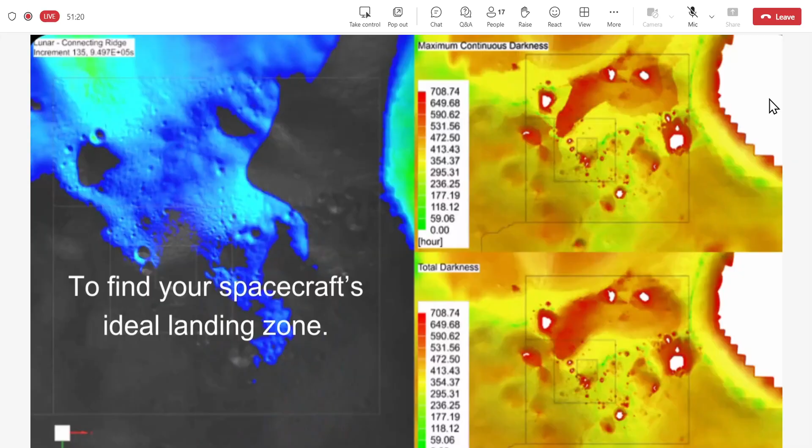As Jeevan did mention, FTD partners with Siemens to bring Siemens's premium portfolios to customers like you, which includes Space Systems Thermal. In the previous slide, we also saw NASA's LRO mission, where we had the thermal profile available for the south pole of the moon. That temperature profile can now be accessed and modeled using Simcenter Space Systems Thermal.

Moving on, the agenda for today, as we published earlier in the invite you might have used to register, is we will look at the next generation thermal simulation tools from Siemens, essentially unifying the conductive, radiative, as well as the orbital loads in a single unified platform.

Then we'll do a quick hands-on workflow where we will talk about leveraging a CAD example to start with, doing an analysis of an SJF satellite, and then we will very quickly see how that translates from the CAD environment to the simulation, in this case the space systems thermal, and then it gets on to downstream workflows like kinematics, which can be done on a concurrent basis.

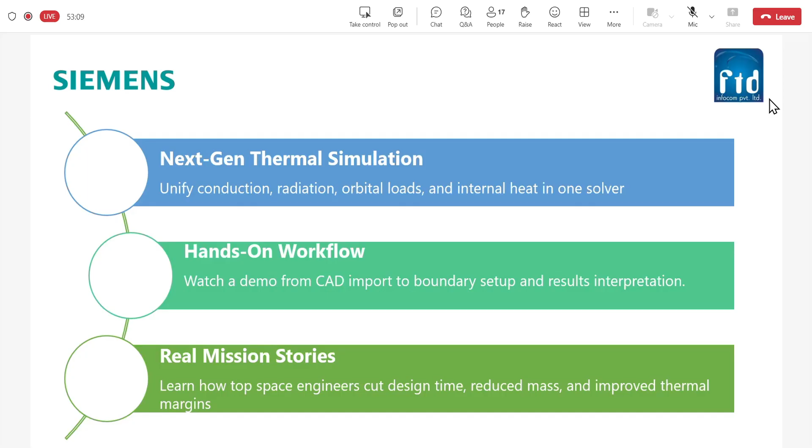As I mentioned earlier, we will take a very quick look at real mission stories, how this is used as a software and as a consultative tool in tandem with real mission profiles. So with that, let's get started. The first element of the conversation is leveraging CAD. Predominantly, most of you are aware that this forms the fundamental block of your new product development or the references.

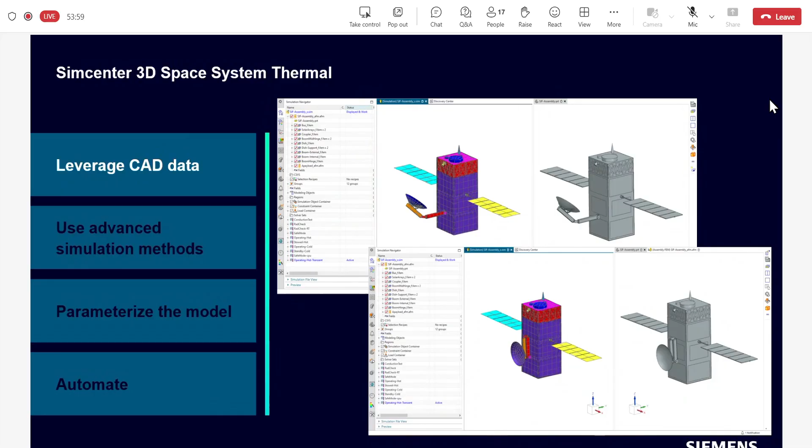So what you are going to see, if you are a novice user or possibly the first time entrant to the NXCAD environment, is this holistic NXCAD environment, or the NX platform, where the applications are aligned based on the deep feature functions they carry, which reflects the industry workflows, for example, modeling, assembly, drafting, and so on.

So what you see is a SJF assembly, and on the left-hand side, you'll see the assembly navigator to start with. We would like to take a quick look at how we are going to navigate through this assembly, just to do a few checks. For example, the antenna is in the deployed condition. Then we have a couple of sub-assembly elements which we can quickly navigate through, for example the star tracker, the bus, the boom, and of course the payload.

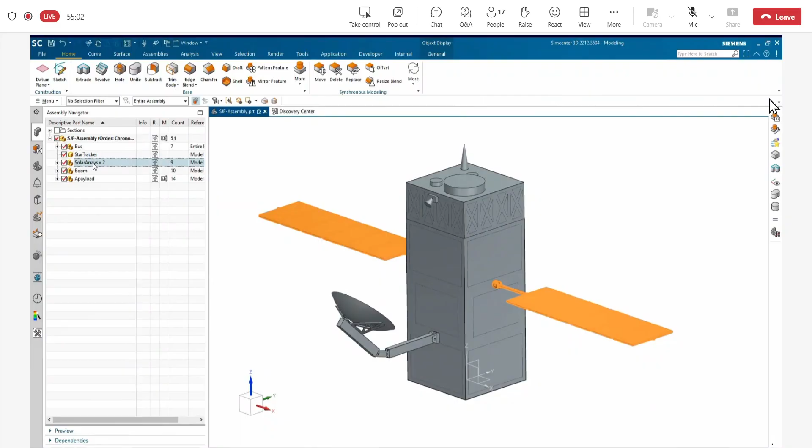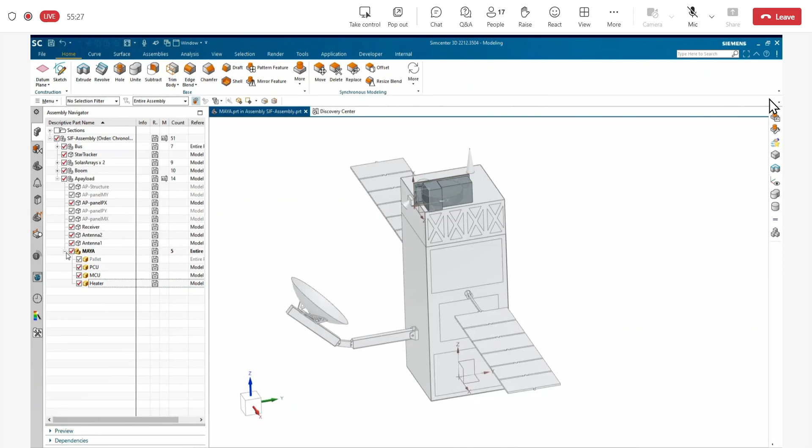If I go into more detail on the payloads, here's a bit more deeper insight for you: within the payloads you have PCU, MCU, heater, and pallet units. This is the area of focus for us, where we would like to do some thermal simulation to start with, essentially to capture the amount of heat generated through radiation and conduction. The backside of the payload has three perforations or slots, which virtually represent the cooling mechanism that we will talk about in a minute.

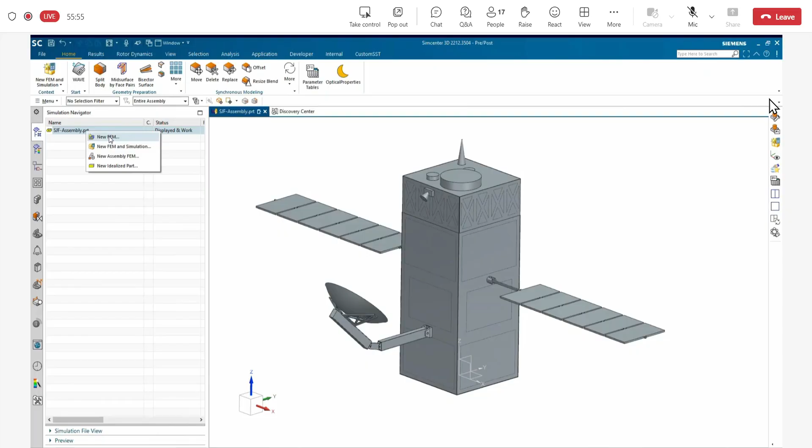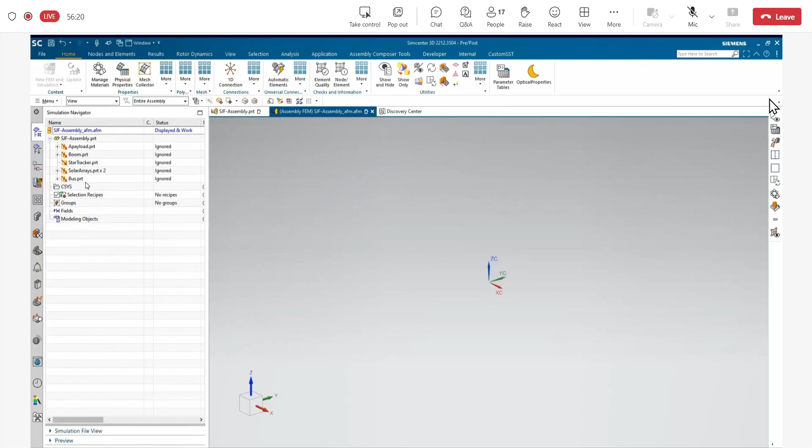Once you have inspected or navigated through the assembly, it's time for us to create a simulation. In this case, you would want to start with an assembly FEM. You heard me right. SimCenter 3D helps you create an assembly FEM, just like the way you would create your CAD assemblies, and helps you map or superimpose the CAD assembly architecture onto the simulation, thereby making sure your CAD and simulation are in sync and helping you make local changes very quickly.

On the top left screen of the simulation navigator, you are able to see that we are positioning or bringing in the part-level meshes we have done, and we are going to assemble them. This is typically a bottom-up approach of assembling the FEM, where you have a couple of FEM parts, and then you bring them in and assemble them to define the complete assembly - in this case, the SJF satellite.

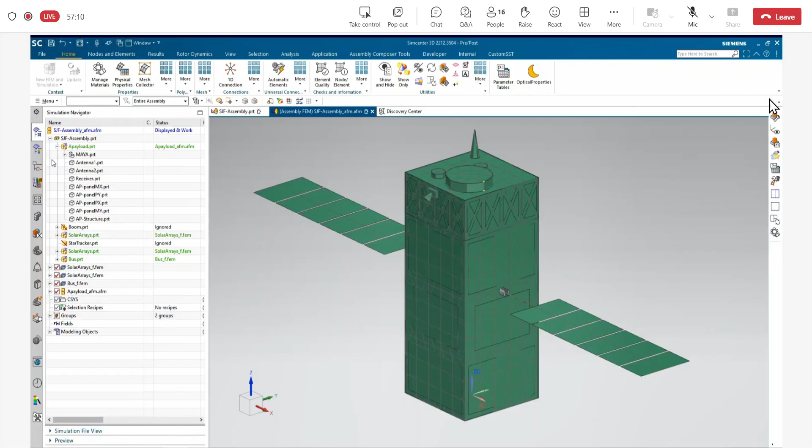Some of the components which are deployed or populated with the FEM are annotated in green color, whereas for the rest, which are not, they still need to be populated - they are either left gray or some are ignored, depending on the choices you make. Assembly FEM also gives you a provision where you can drill down to a particular sub-assembly or component and check for quality criteria. For instance, you can check for materials, check for real-time attributes, and once done, reconfirm the entire assembly is being assembled or mapped to your satisfaction.

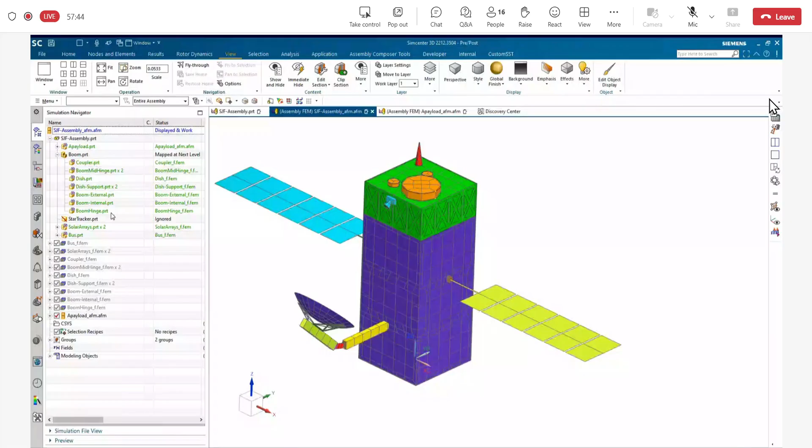So what you see on the left-hand side is the mesh of the assembly, which is an integration or a combination of multiple parts. This is one approach that Simcenter Space Systems Thermal takes.

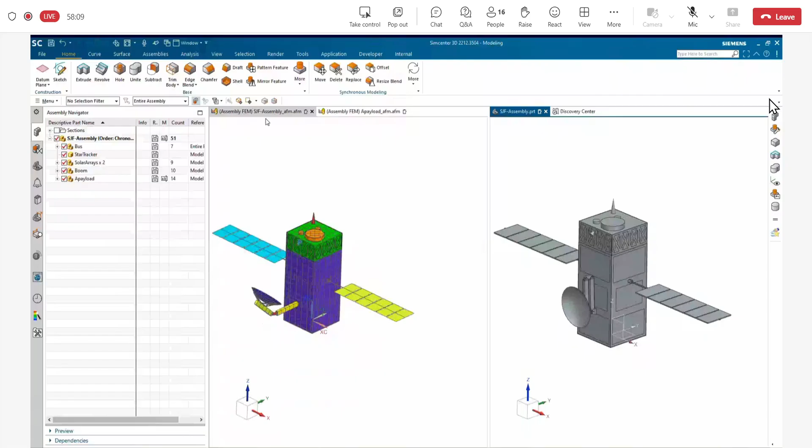The next thing you would want to do is induce a change into the assembly. For example, you would want to see the antenna stowed in the stowed condition. Earlier, we had put it in the deployed condition, but suddenly, because of a change in the CAD, you also see that the assembly FEM is out of date. Once you hit the quick update button on the top left corner, you see that the mesh of the antenna and the corresponding holders will also get updated. This gives you a tremendous ability to do a quick check in terms of design changes, and to further refine or take the assembly through the next set of boundary conditions.

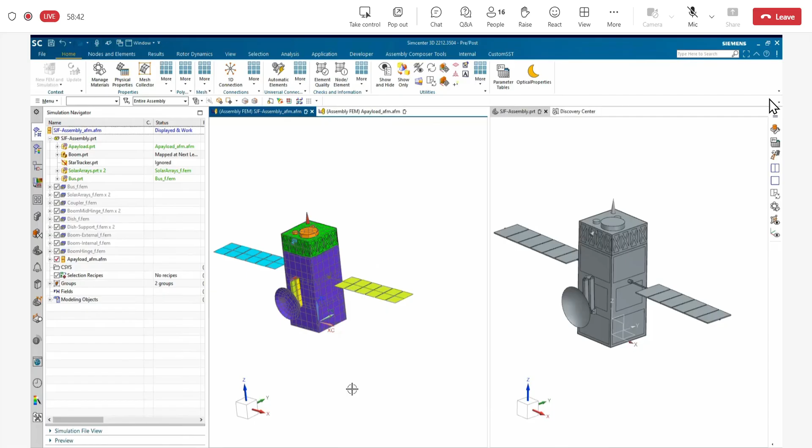What we would like to do is quickly walk you through a couple more workflows with Simcenter 3D Space Systems Thermal. We are going to use a live example here. You can indicate to us in the chat box if you are not able to see the Simcenter 3D screen.

If you are a first-time user of Simcenter 3D, this is the user interface you will see. Like most CAD environments, we have a simulation navigator which helps you navigate through multiple aspects of your model, including the geometry you have specified. It also goes into the simulation and the FEM file, and so on. Right now we are looking at the assembly FEM file.

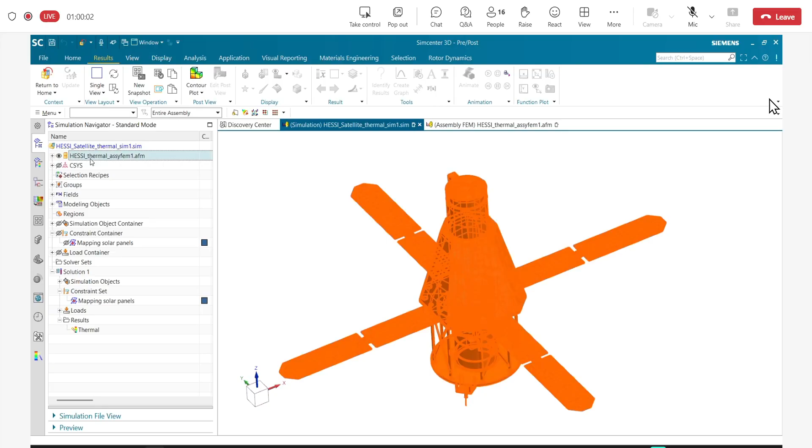If you pay closer attention, you see a series of elements which are meshed either in 3D space or in 2D space, depending on the modeling approach you want to take. What I really want to spend time explaining here today is how you have the thermal model available to you, or how you have created the mesh through meshing practices. So these are the simulation environments we are working in.

The first thing I would like to look at is that if I have to do a Space Systems Thermal model, we need to set up some initial conditions. The first one being what planet you would want to model. Space Systems Thermal gives us the ability to model various planets, including Earth, Venus, Mercury, Saturn. And if you have no specific planet to model, you can start with a generic one, as you see on the screen.

The second thing you would like to look at is the orbit, where we are looking at the classical geostationary, or the sun synchronous, or Molniya, and so on. This gives you the flexibility of playing around with the planet and orbit type. Depending on the choices you make, the orbit periods are locked in, and these calculations are done automatically at the back end.

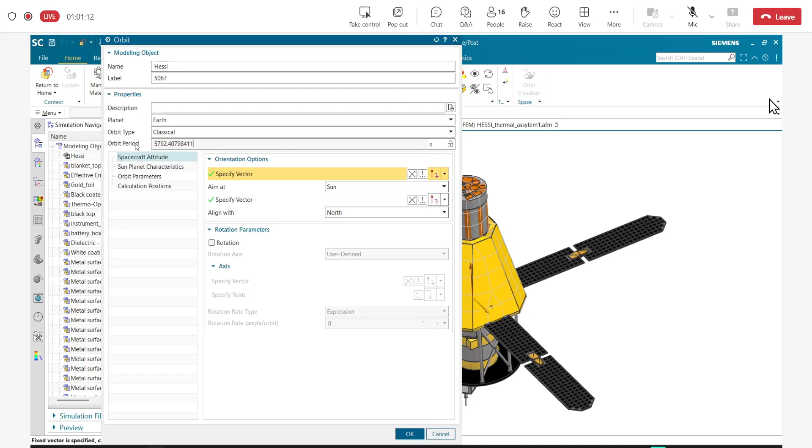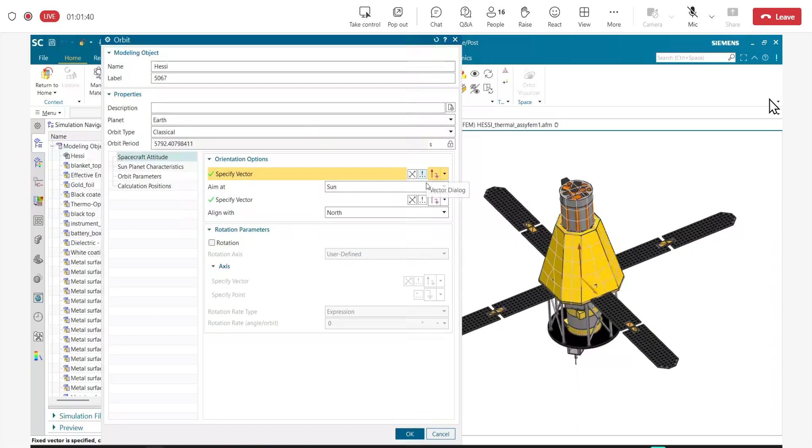You will be able to look at the orbit period. The second part you are going to look at is how the orbit, or the satellite, is going to be positioned hovering the Earth in the classical orbit type. This is where you specify what we call the vectors, which essentially help you position the satellite in the context of the sun as well as the orbiting entity. You can leave it with the current choices, or you can make your individual choices right here.

The second part you would like to look at is once you have defined the planet data, at the top we talk about the planet period, which in this case is about 86,400 seconds. We also want to account for albedo, which in this case is about 0.3. Then there are additional parameters you might be interested to spend some time on.

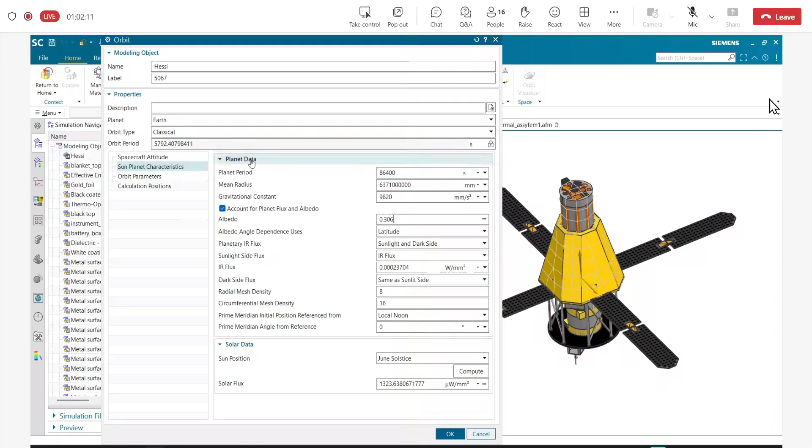In my case, I'm more interested in positioning, or talking about the sun position, where we discuss the June solstice, or depending on the simulation you want to carry out, you can set up other positioning parameters. Correspondingly, you have a number that is calculated for the solar flux available to you.

In terms of orbital parameters, you can specify the orbit in terms of minimum altitude, radius, or maximum altitude, radius. You can also look at eccentricity and periods as options. Moving on, what we ideally want to do is start with the planet as Earth, looking at the orbit type as classical, and then we're done. Once I define this modeling object, it comes and resides here in the simulation navigator.

At any given point in time, this is a parametric entity. You could come back and change the essential parameters that you would need.

A similar way of engaging on the simulation objects or the modeling objects is defining what we call as the thermo-optical properties. So there are multiple ways that I can define the thermo-optical properties here.

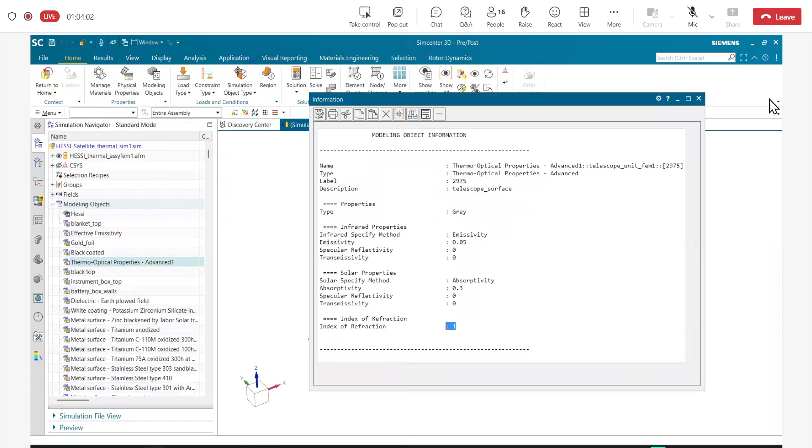Very quickly bringing to your attention, one such has been created. I can take a quick look here, and this comes in with an infrared specify method for emissivity. We are looking at an emissivity of 0.05, an absorption coefficient or absorptivity of 0.3, and an index of refraction of 1. So these are the details that are available to you as part of your modeling objects.

These have been done, and the details have been captured very intensely as part of your modeling efforts, as you would see here.

Once your modeling objects are done, I'll quickly walk you through what we call the simulation object container, where we are talking about the relationship between the two parts or the two surfaces, edges, or the solids themselves, and how they are connected with each other.

For example, the first one, beam to top ring — let me give you a quick rundown on how this looks in terms of the relationship. Here, we are doing a thermal coupling for a given set of faces or a given set of edges, and we are going to look at primary and secondary regions or primary and secondary faces.

And the last thing you would want to specify is whether you're defining the thermal coupling through total conductance, total resistance, or a heat transfer coefficient, or an edge contact definition. In this case, we have done an edge contact, which is around 35 watts per meter Kelvin for a particular length, in this case, meter length.

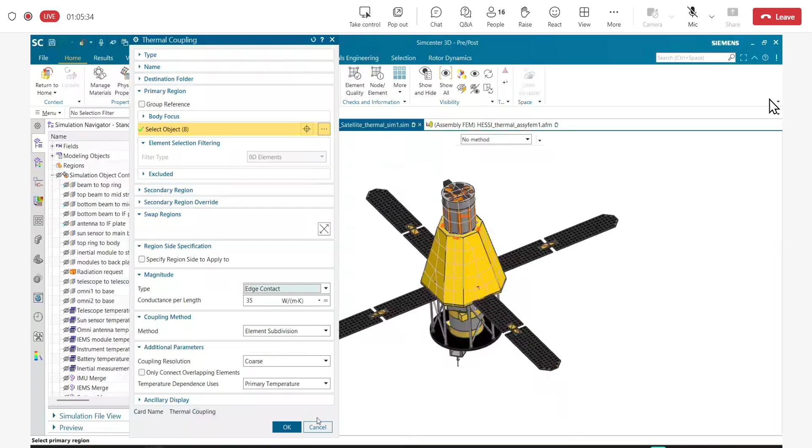Once you are done with this, you can go back and take a quick look. Where does this reside? It's right up here. And similarly, you could add some more simulation objects.

For example, you would want to look for the radiation requests. So what are the entities for which you would want to have the radiation requests, whether it's for the top external radiation, or the non-dominant or say non-top elements for the radiation requests? That's something you will be able to articulate.

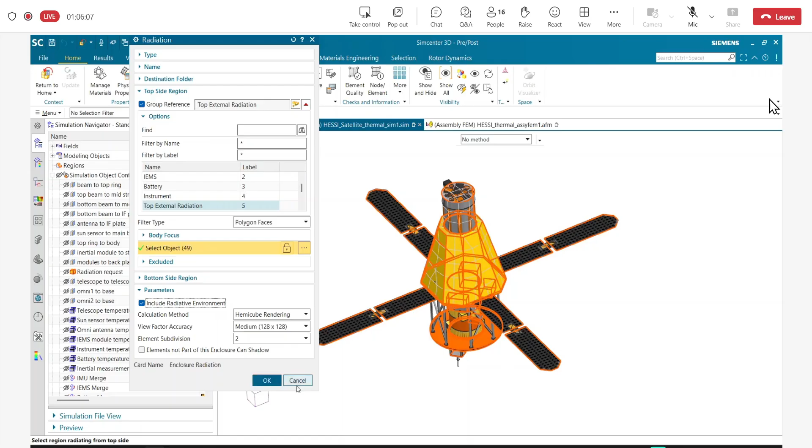We are still in the process of setting up our model here for the simulation. What we looked at is the modeling objects, where we defined the orbit, and also the advanced thermo-optical properties like emissivity and absorption.

The next thing we quickly did was look at the simulation objects, where we talked about the thermal coupling. It can be a very intense and advanced thermal coupling, or we can look at straight out of the box, automated thermal couplings. And then we looked at a very quick understanding of what we can do with the radiation request.

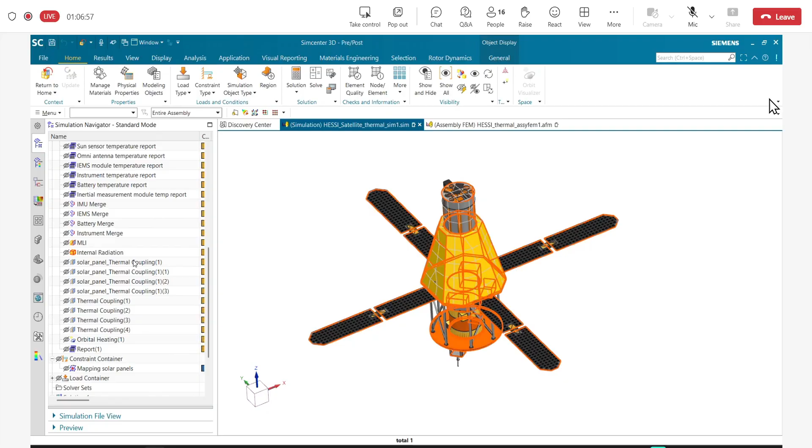And then finally, we are going to take a sneak peek into the constraints and the loads. Let me come to the loads first. Now, what are the loads that we are talking about here?

We are going to talk about a quick set of 220-watt load — that's the heat load we are seeing from these elements. Now, this could be a linear heat load, or it could be driven through a couple of expressions or parameters. For example, it could be measured, or it could be an expression, or it could be a function, and it can come from different unit forms.

Simcenter Space Systems Thermal is unit independent. Anything that you punch in will get carried and baselined with SI systems, and can be retrieved in the form and shape of the different unit systems that you will need for outputs.

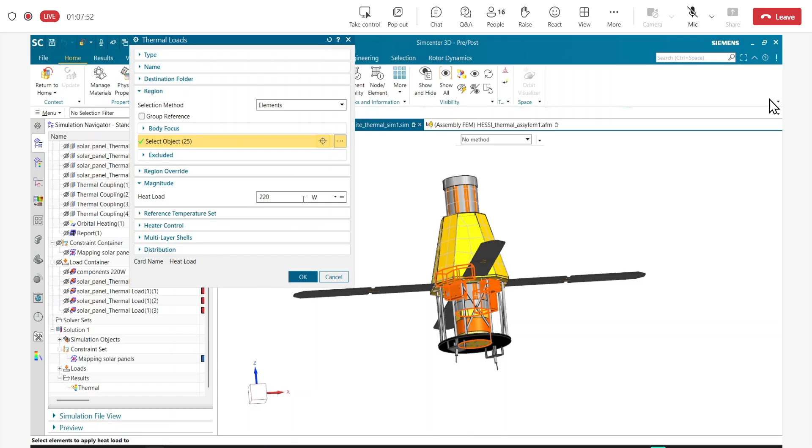So we have a component of 220 heat load. Then if I look at the four thermal solar panel thermal loads, I see a heat dissipation of 150 watts. And this is happening — the selections are based on elements, or, if you are doing it for the duct, it can be duct fluid nodes.

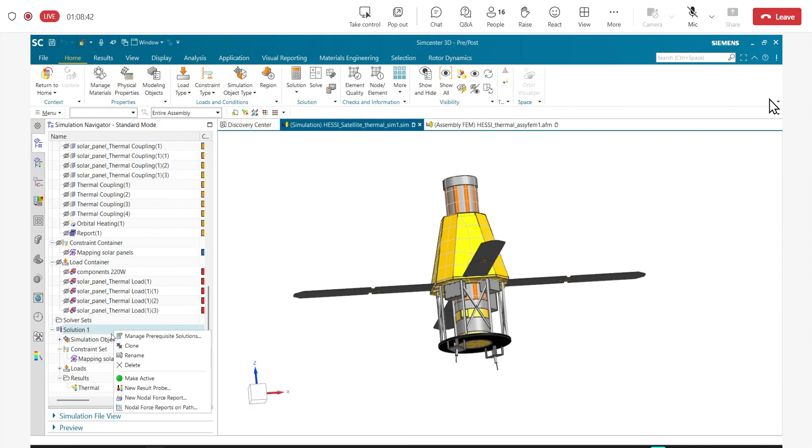So what we have here is a series of load containers, which essentially capture all the load bearings that are going to happen onto this particular model for this simulation. Once done, we have set up a simulation here. The way you are going to do it is either you jump start with doing a space system thermal, which I have created one here, or it's as simple as we go ahead and quickly say.

So either I can do it from the bottom end, or I can just go ahead and say I would like to create a new solution. And in this case, we are trying to drive a space system thermal conversation.

What are we trying to do? Are we trying to do a thermal simulation, or are we trying to superimpose or map the thermal simulation results to the structure? You have hybrid workflows available to you. In this case, we want to do thermal for the space systems.

That gets created here, and you have these loads as well as the boundary conditions, including the constraint sets defined. Once you hit solve, you will see a series of results.

In the interest of time, I'll quickly walk you through the results. The results are available here to me once the solution is done. If I do a double click, you will see that the simulation navigator intuitively changes to the post-process navigator. So the software is intelligent enough to understand that now you are moving from the simulation to the post-processing engagement, hence it provides you a series of tools and workflows where you can navigate the results.

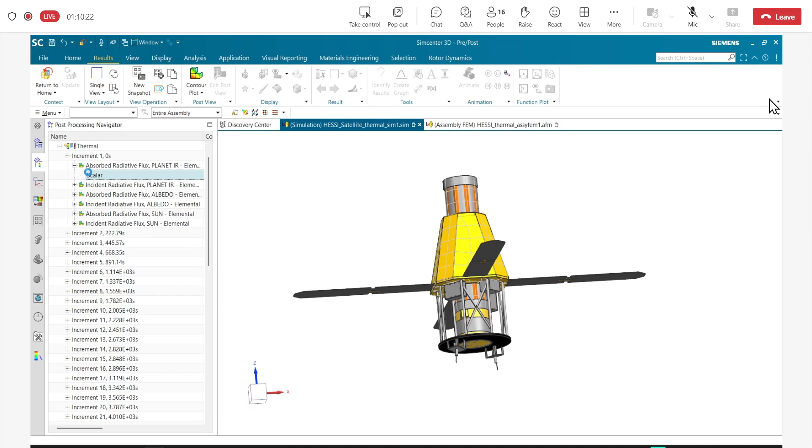For example, we are looking at the thermal simulation here, where we wanted to understand the absorbed radiation as well as the incident radiation flux for the planet, the albedo details, and the sun. This is one example, just to give you a perspective of how this looks like on your screen.

You could also specify in a single window multiple entities. What I would like to do very quickly is, while I am able to see the radiative flux for the planet and the element, we would like to also see the absorbed radiative flux for the albedo, for instance, to compare.

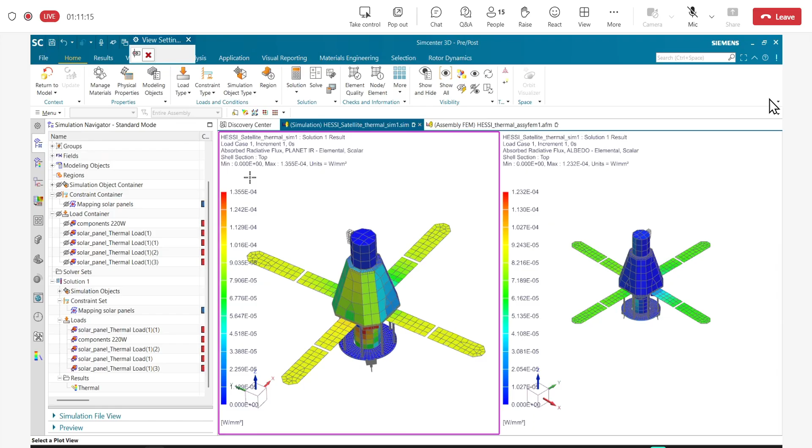So here is an example where you could do a side-by-side comparison or side-by-side play. On the left-hand side you have radiative flux, and on the right-hand side you have the absorbed flux for the albedo details. Now, once you want to come back, you can quickly go back to the model and set it up for a single view.

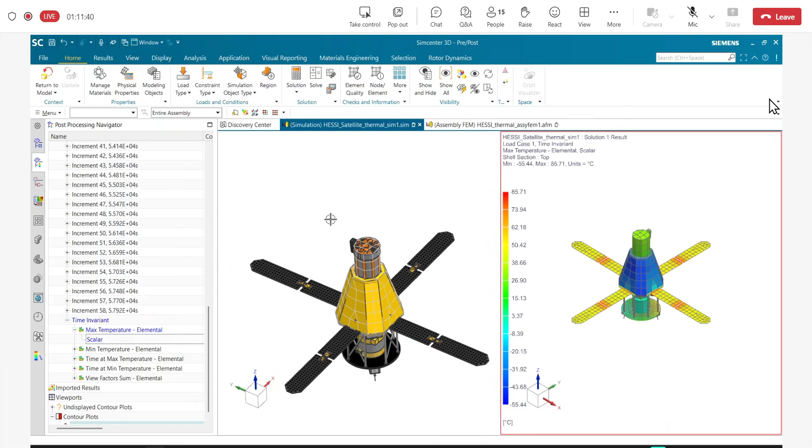In my case, we would want to understand a little more in terms of what are the maximum temperatures, for instance here, where we are going to look at the temperature distribution. You would notice that on the left-hand side of your view we have the finite element model, and down to the right-hand side you have the results.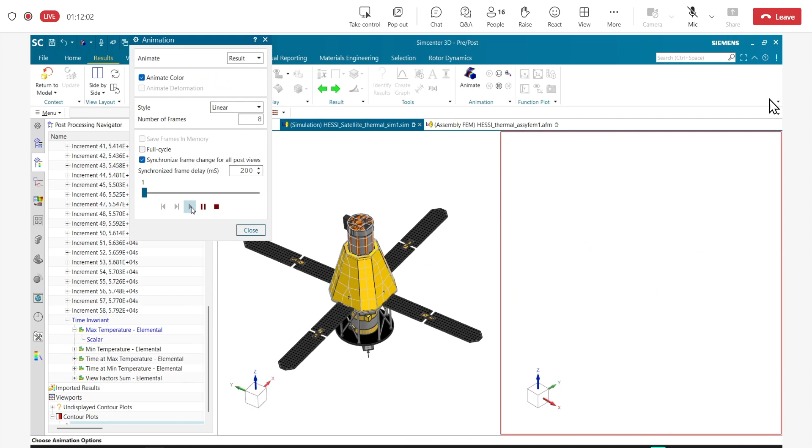What you can also do is animate, or play around with the results a little bit. For example, if I want to animate the results, I can quickly go ahead and do a quick animation, looking at how the temperature distribution takes place for a given set of boundary conditions that we have established, which ranges from minus 55 degrees all the way up to 85 degrees. I'll take a pause here.

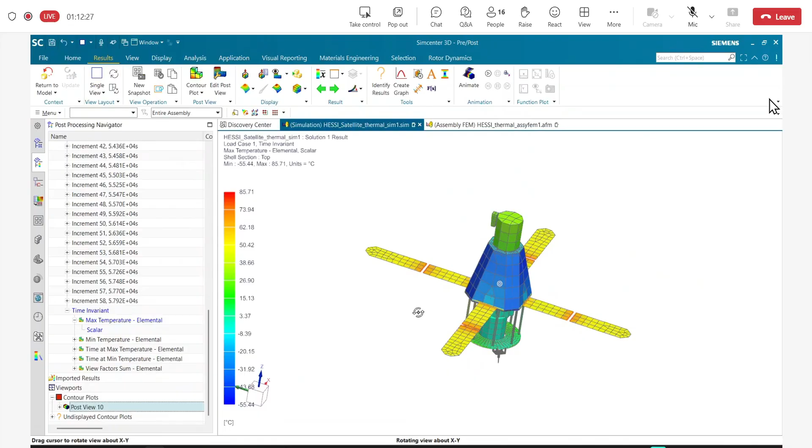What I would like to do is go back to my single view, and then we would like to plot the temperature variation. Or if I want to iterate my simulation with the timestamps, I can pick one of these increments, for example increment 55, and then we would like to see how the temperature distribution happens.

Again, a very quick, intuitive interface, helping me to articulate the start iteration from 32, end iteration 58, and then I'll just go ahead and see how the temperature distribution is happening across the satellite.

What's more interesting is I can very efficiently do a quick probe where I can come back and identify the results. For example, these could be your sensors, or these could be your virtual measures where you are identifying the details, and you can output them to a given Excel sheet or notepad. You can copy the information and so on.

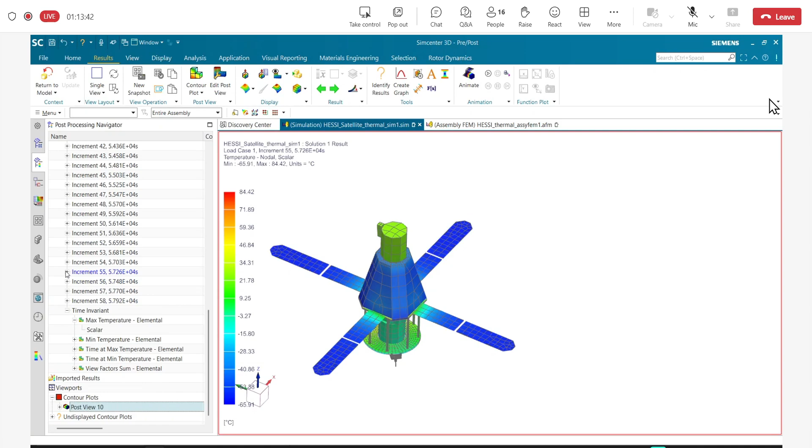That's all we wanted to see on a hands-on session live on Simcenter 3D Space Systems Thermal. As I did mention to you, it's a unified interface, which essentially helps you navigate various aspects of

your thermal modeling, including the pre-processing, solution, post-processing, and of course associating your model with the geometry. That's the integrated design and simulation concept.

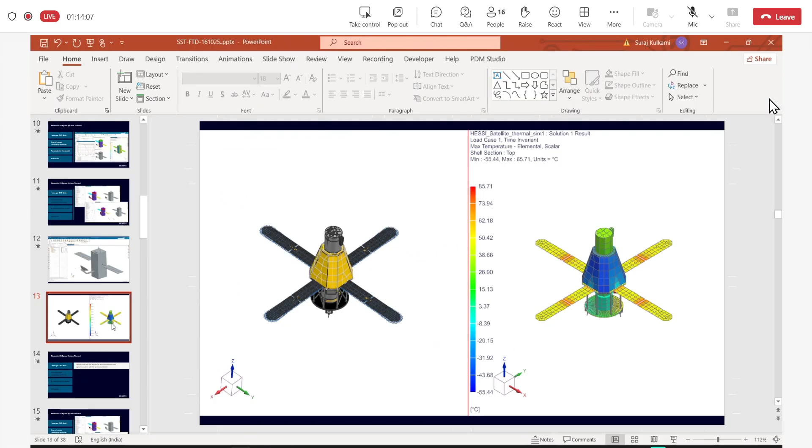What we will do is go back to the contents that we started to share. We talked in more detail about leveraging the CAD, primarily helping you stay in sync with the design team if there is a separate design team doing these entities.

Otherwise, if you are a project engineer, which happens to be the case in the Indian ecosystem most of the time, I do see that the designer will also don the role of the simulation engineer and vice versa. This helps you a great deal in terms of reducing your overall preparation time, and also keeps the geometry and simulation integrity with real-time feedback.

So with that, let's move on to the next one, where we will spend some time understanding. While this was a very simple example of putting our satellite in orbit, asking for the orbital loading in terms of the radiative heat transfer and what happens inside the satellite because of the radiative heat transfer

and the conductance, we will use some complex—or should I say advanced—simulation methods, which will help you reassess or recalibrate the physics you are simulating, and help you model the virtual model a lot closer to the actual physics happening in space.

So for that, we'll take another example: the SIF assembly. In this case, we have created multiple solve sets.

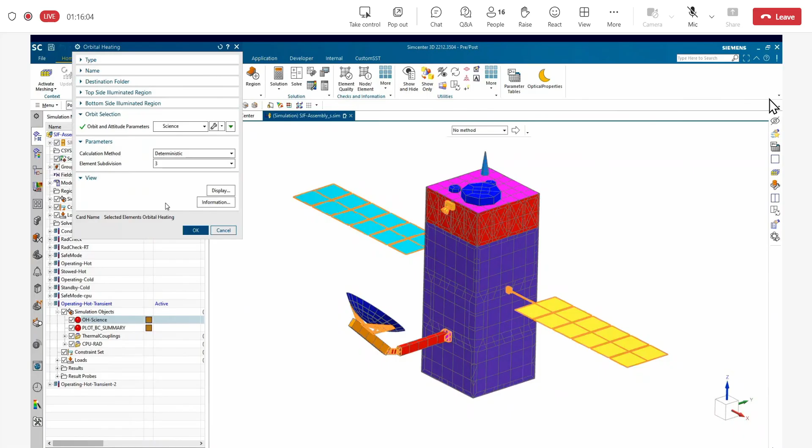As I mentioned to you, either you can pick the whole geometry of the satellite, or you can go back and pick a series of surfaces embedded with the top elements that can be picked.

Here, what you're doing is trying to establish the orbit and the positioning of this satellite in the context of the orbit.

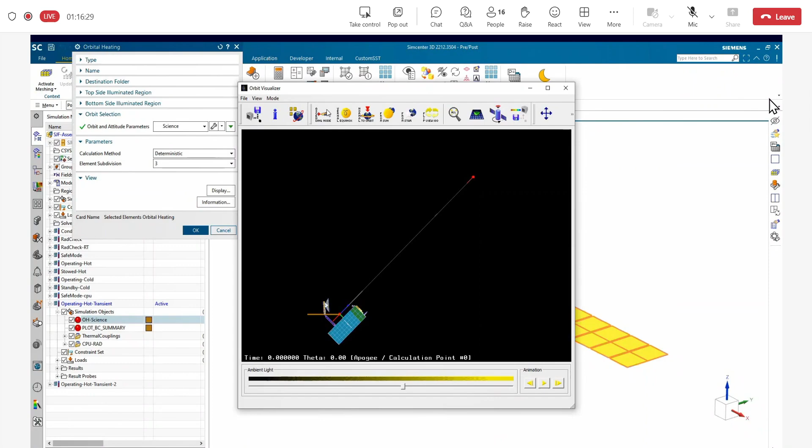And the beauty with Space Systems Thermal is that you will be able to see how the satellite is being positioned with respect to the planet and how it is going to orbit.

For example, in this case, the satellite is orbiting the Earth, and we have defined certain parameters. This infographic, or visual representation, helps you position the satellite a lot more smoothly and quickly.

The Orbit Visualizer is an embedded tool, or an embedded workflow function, inside Space Systems Thermal, that helps you navigate through the visual aspects.

The two simulations that we want to do: one is the orbital heating, and after that, we also want to take a look at how the cooling affects the payloads.

In this example, what we are seeing are the payload panels. If you remember, we explored this as part of our earlier example—the MCU, PDU, and the payload.

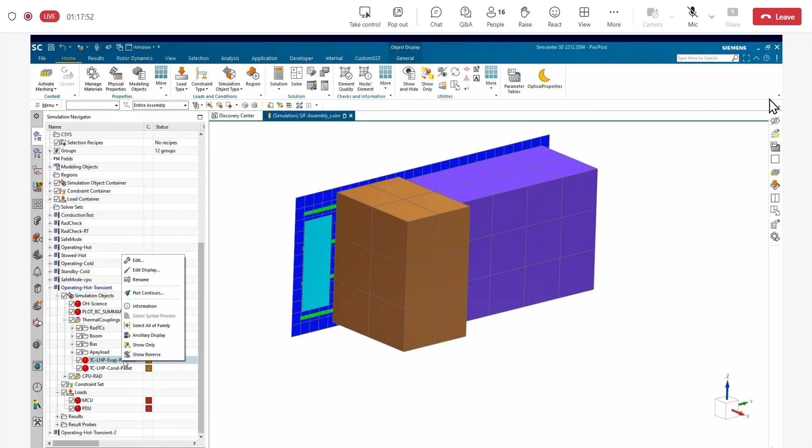What we are doing right now is assigning certain heat generation entities to these payload elements, and how they are connected to the atmosphere in terms of discharging the heat, either through

the evaporation-radiation mechanism, or the condensation-radiation mechanism.

So here we are doing the thermal coupling either through a total conductance method, which can drive the conductance through a static value, or you could specify the total conductance through a conditional builder.

Basically, you're building a function or an equation which will determine the conductance—a very classical example of incorporating your what-if scenarios.

In this case, we are going to settle for a constant value, so we'll just knock it down and say this is about 20 watts per degree centigrade. That's about it.

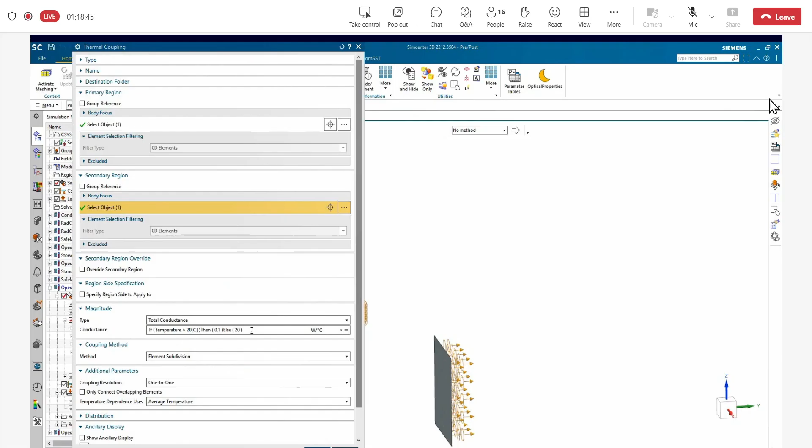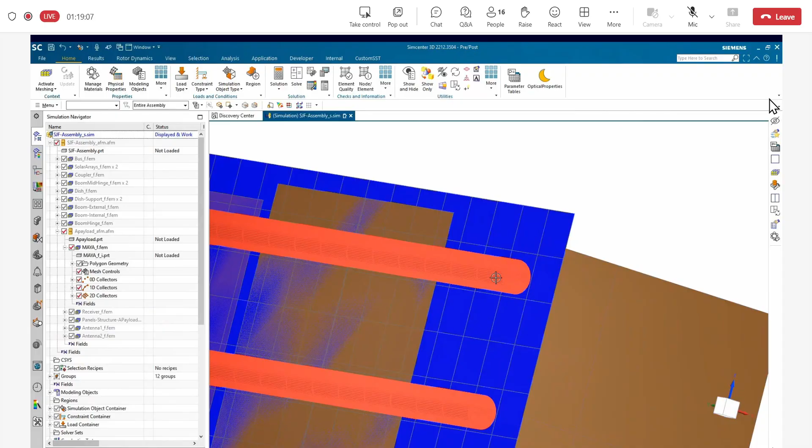Once you are done with the thermal coupling, we will reload our payload assembly here. This is a very critical area we wanted to highlight, where we look at the 1D connections, or basically the piping modeling that we do.

This is a very hot topic in the industry today, where we are going to look at the pipe modeling and the effect of heat pipes. There are four pipes that you see on your screen.

In terms of thermal coupling, what we are doing is associating these pipes to the payloads through different mechanisms or methods. One of the things we would like to do is showcase the piping cross sections so that you get a visual representation, or you can keep them in terms of the bare minimum entities on the assembly side.

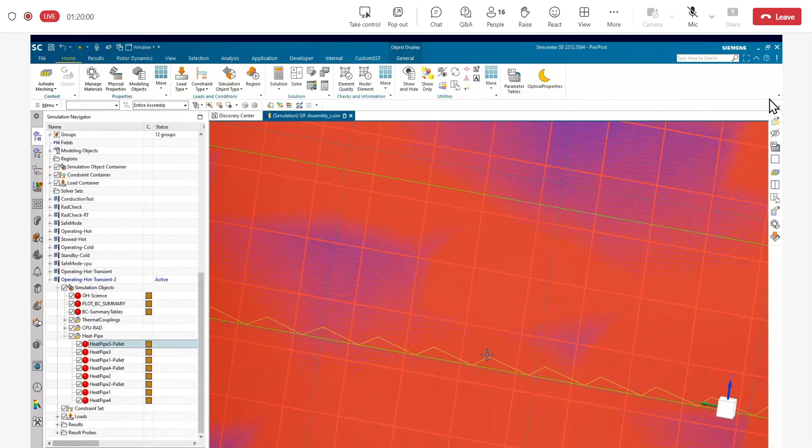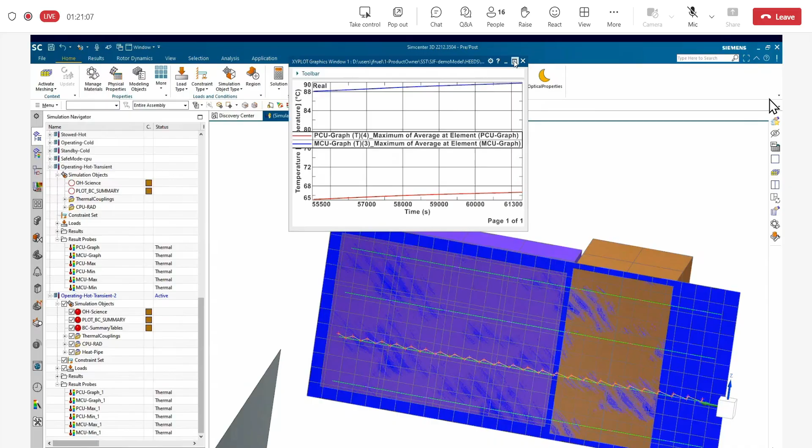Once we are set up with the simulation file, we'll go ahead and solve this. In the interest of time, we already have the solution done. If you look at the various elements of PCU, MCU, we are looking at the maximum and minimum temperature distributions, primarily with the cooling or heating pipes and the conditions we're looking at. The side-by-side comparison of operating hot for load case 1 and load case 2, that's hot transient 2 results, will give you a seamless comparison of what changes you induced into your boundary conditions or design, and how they impact your overall results.

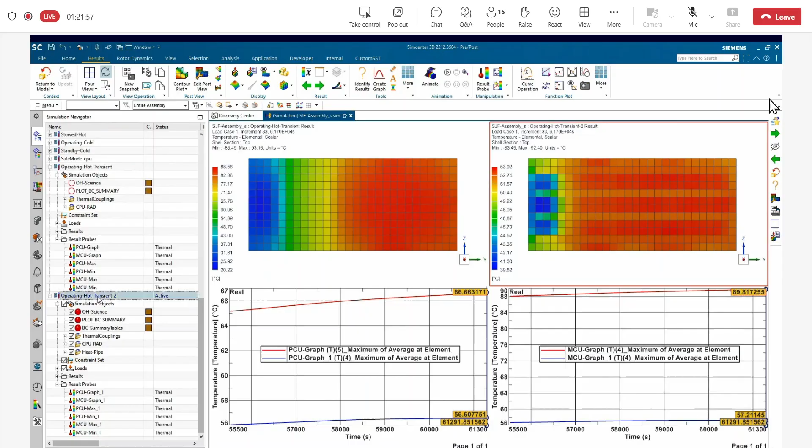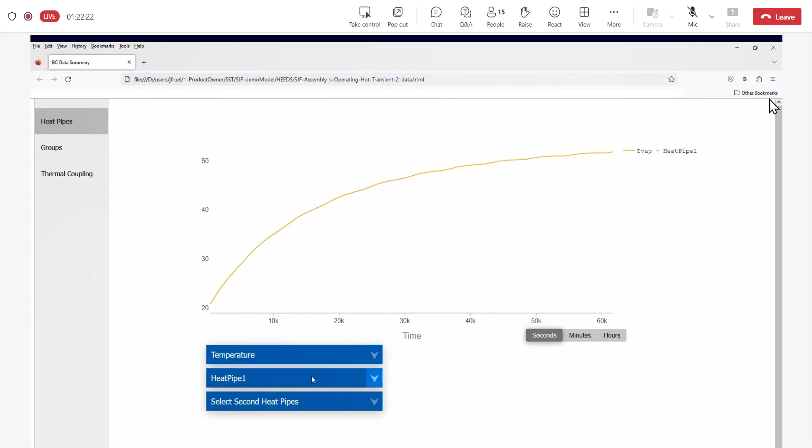You could also create a series of snapshots or templates which can be proprietary to your organization, for instance a specific set of template formats that you generate using Simcenter Space System Thermal. What we are seeing right now is an HTML file, which we'll open up and take a quick look at how we see the heat pipe and the temperature distributions over a period of time. For example, I can pick heat pipe 1 and see the temperature distribution in terms of seconds versus degrees centigrade, and how this is translated. You can pick and choose the details on the area or region of interest, and similarly look at heat pipe 2, 3, and 4.

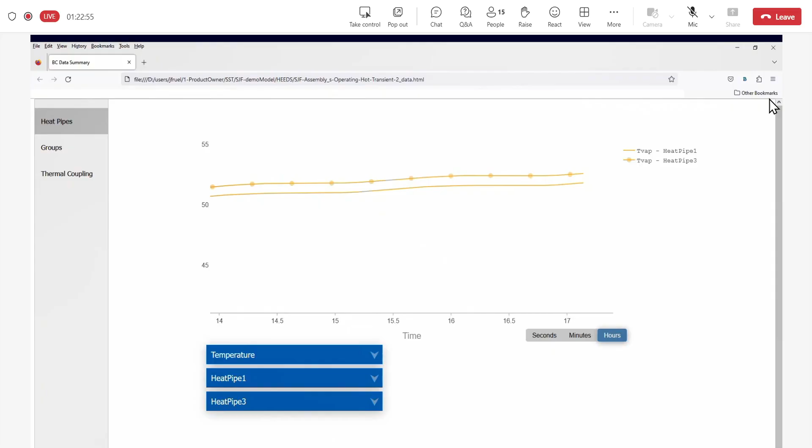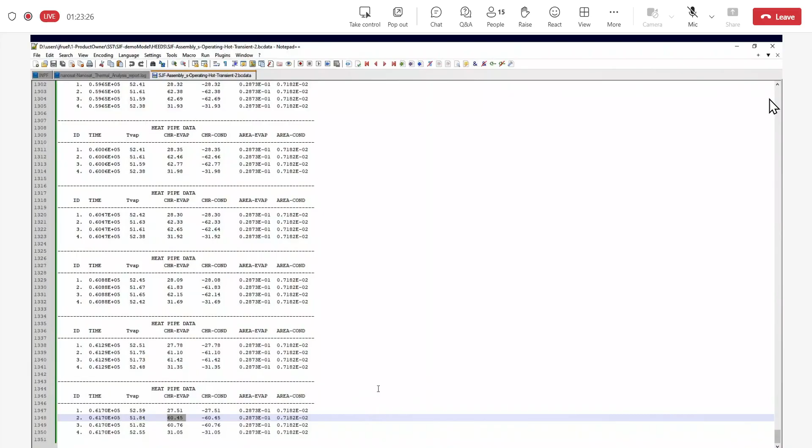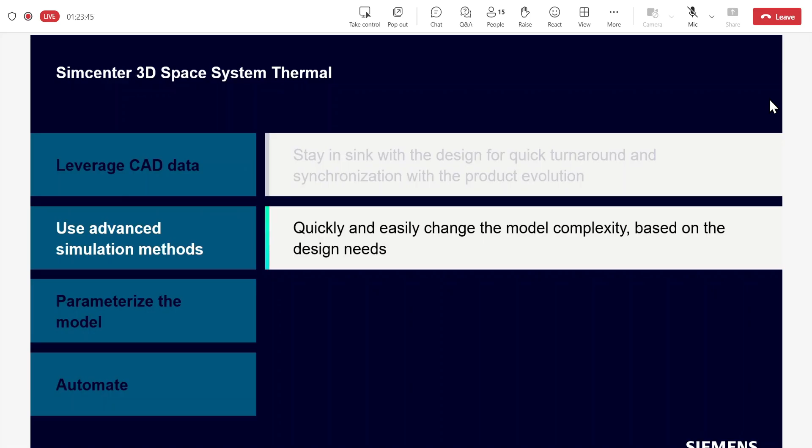If you look at the BC data input file, as you'll see on screen, it gives you a lot more detail in terms of various temperatures for evaporation, condensation, and so on. You'll be able to pinpoint and articulate the temperatures you'll be looking for in your downstream simulation activities. So that concludes what we call using advanced simulation methods, especially simulating heat pipes, which are very much in need and a very popular trend these days, in articulating your radiative, conductive, and convective heat transfers in the space industry.

We touched upon this briefly at the beginning, where we talked about parameterizing the models, because you run through so many operations, whether hot conditions, cold conditions, inertial conditions, or what we call static conditions. These are the entities created, for example the parameters needed to create multiple combinations for different modes, whether safe mode, operating hot mode, operating cold mode, standby, and so on. So how we're going to do this is using a very seamless integration of the parameterization entities into Space System Thermal. Let's take a quick look at this.

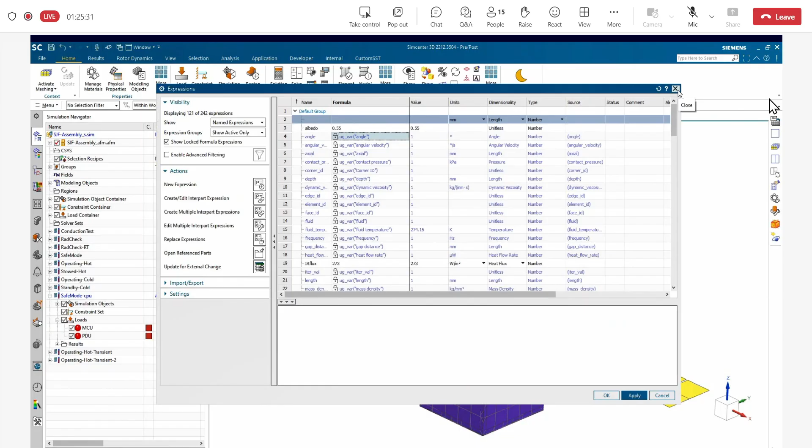You have seen the SIF model. What we want to do now is pick one or two, for example these are the 6 or 7 iterations or combinations that we have for the MCU and PDU loads. Now you can go ahead and define the parameters for the thermal loads, and these thermal loads can come in from expressions, driven either by an Excel sheet or by manual inputs. Here we are going to see the expressions which are named, where we talk about albedo, for instance it's 0.55, slightly on the higher side as against 0.3 that we specified earlier. So this gives you some initial ideas, or the initial references, and the rest of the angles are derived parameters, which basically reference the primary parameter or variable.

In terms of parameter tables, you can either import a parameter table or create one, what you are seeing on your screen.

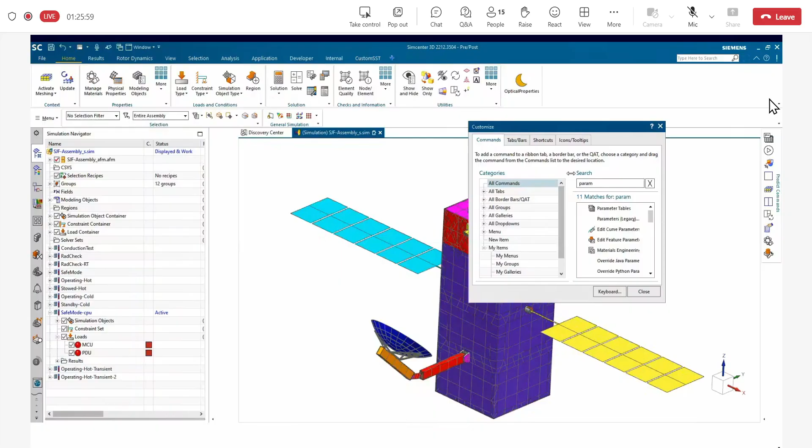Once you have a parameter series, you will be able to create a custom ribbon bar for the parameters, making it your own, so that you can access it very quickly without spending too much time on the other elements.

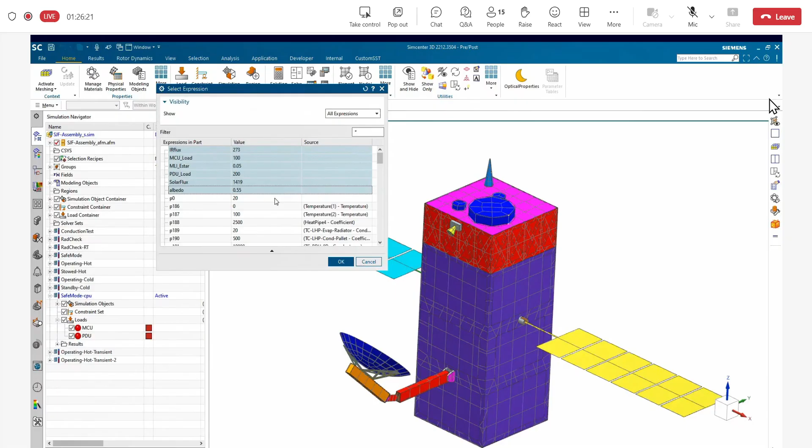So what we do is add expressions, and these are the expressions available to us in the part. We'll pick up the first 6 or 7 and add them to the table in terms of the parameters.

This is a configuration, and you can either activate it or duplicate it and change the values so that it becomes parametric. And of course, it's a series entity.

You would do the same thing for operating hot, operating cold, static hot, standby cold, and so on. The other way is to drive these parameters through an input file, what you're seeing on your screen.

You could always use one of the best practices with the software: remember the path of the file you are choosing. This eliminates issues when you move the file, either the source file or the simulation file, and helps you keep track of it.

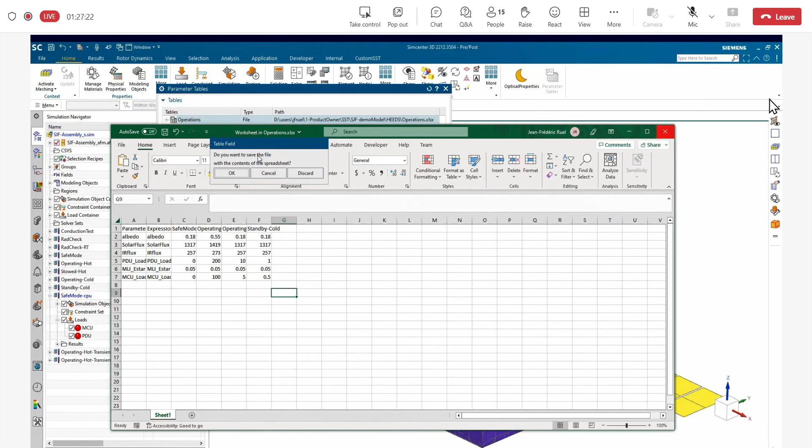The parameters are bidirectional in terms of associativity. Either you can edit them inside the Simcenter Space System Thermal environment, or vice versa. You can drive this conversion of the parameter tables through an Excel sheet.

As we just saw, we edited one of the parameters to 0.5, and that gets updated and reflected in your parameter table here.

We would like to keep safe mode cold as the starting point, or the active parameter set, and we will get started from there. Once you define these parameter sets, you can go back and articulate by bringing them in as part of your simulation, as we're seeing on the screen.

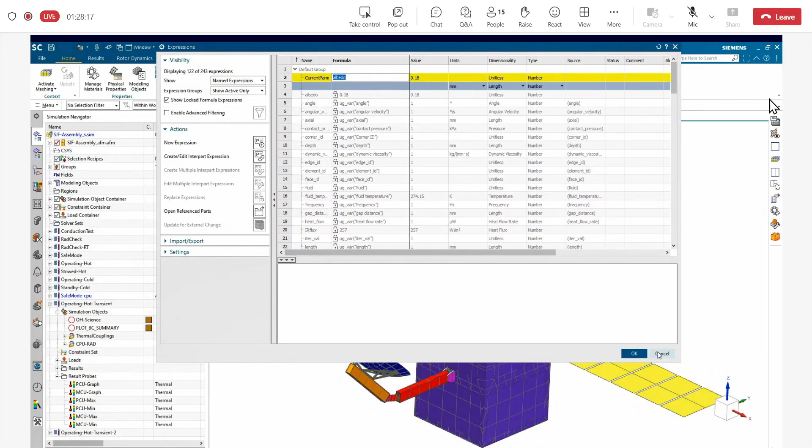Similarly, you can position the boundary conditions depending on the operation—hot, cold, static, or any other conditions you want to simulate. What you'll have is a combination of 4 simulations for 4 different conditions, which is a little cumbersome to manage. This is where we bring in the parameters and operating objects to make it easier to deploy the boundary conditions and get the simulations done.

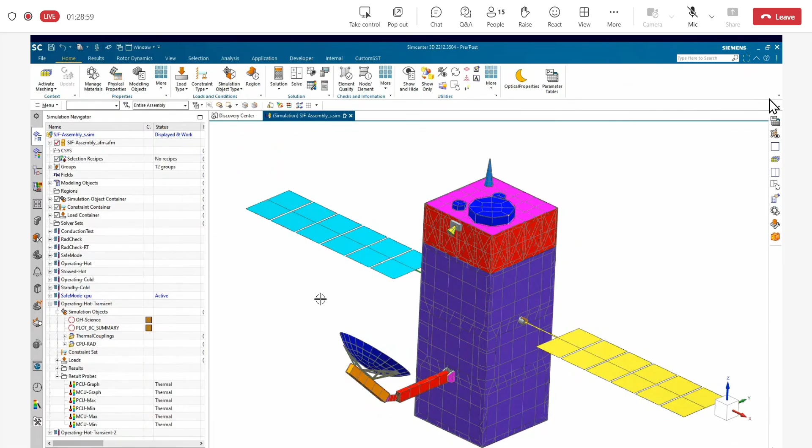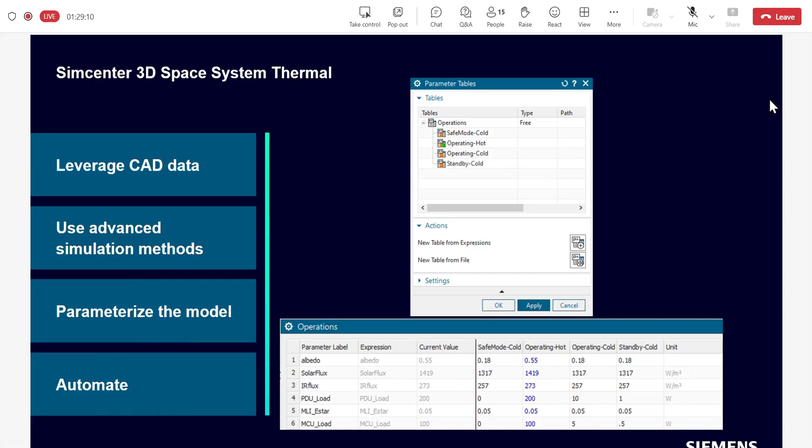While parameterization of the model is extremely important, as we saw in the previous slides, it's even more important to talk about how we capture all of this information and automate it. We are talking about AI these days, and quite a bit of automation. Here is an example where we will talk about automating in the context of Space Systems Thermal.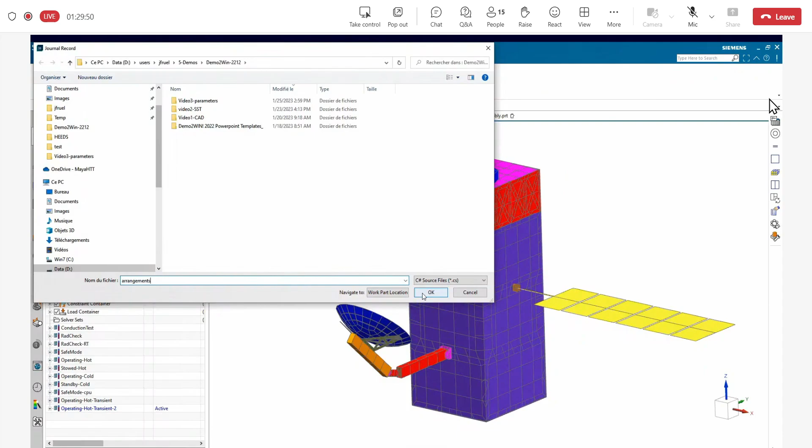For the same SJF assembly, we want to catch hold of the arrangements—that's the stowing as well as the deployed condition. If you're somebody who would want to record a journal, we are doing that here live on the screen, and this is going to be C#, C++, or Java source files.

What we want to do is define configurations. I will open up a simulation file and then switch to the modeling or assembly file here. As you know, the boom had two arrangements—one was deployed, the second one was stowed. Now I want to change the condition from deployed to stored.

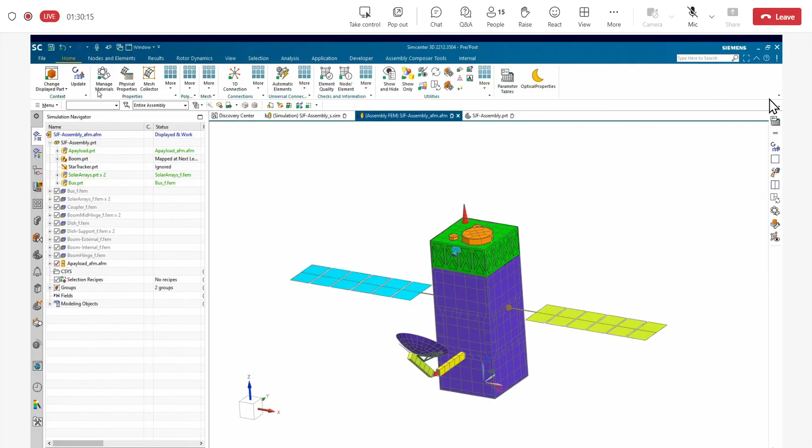While the model or the assembly changed, my finite element model remains the same. I go back to the FEM update. The FEM updates because it's created based on the geometry or the assembly.

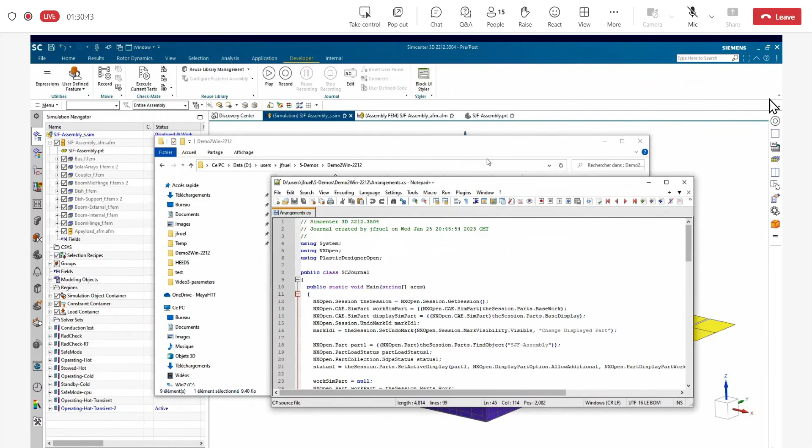Now, this whole series of actions is captured as part of your journaling, or interactive macro recording. So we are going to open this with Notepad and spend some time understanding how this information is captured as part of the scripting language used—either NX, Java, C++, and so on. In my case, we are going to change a variable from stowed to the arguments.

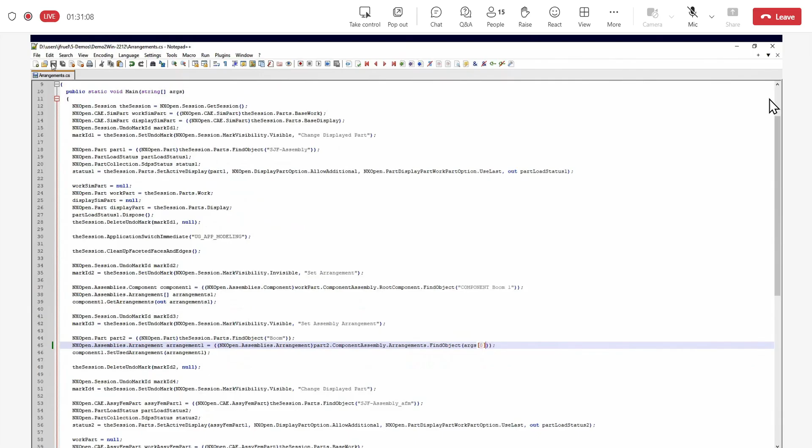Once done, we will quickly save this, and this becomes a basic reference or a script for us to execute for any given assembly, moving it from the CAD environment to simulation, and this is in a stowed condition.

The customized ribbon bar gives you the provision to create a brand new tab or UI on your existing UI, and then you should be able to put in multiple commands. What you are seeing on your screen now is you are able to create a new user-defined command with the prescription of the previous journal, what we had written, the source file for the arrangements.

And in this case, the condition is stowed or deployed, okay? Or it can be from deployed to stowed and vice versa, depending on the context and the configuration that you would want. You can associate an image to this, making sure the team understands the feature functions that are necessarily needed for this one.

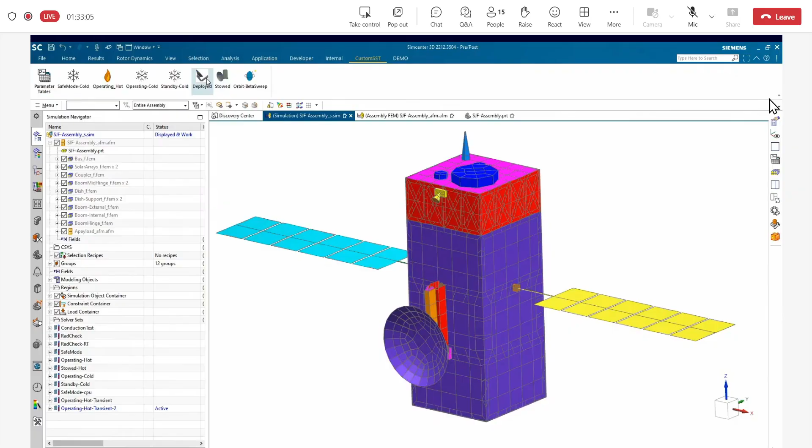Once done, you could continue to add a few more commands to the ribbon bar. In this case, when I execute the deployed, it moves from the stowed to the deployed condition. Similarly, we can do 3 or 4 configurations and custom buttons for various conditions like hot and cold cases. You can bring them here as you would see on your screen now. You have cold, operating hot, standby cold, deployed, stowed, and so on. We also have a mode called Orbit-BetaSweep, which essentially uses all of these methods, or some of them, to solve the problem for space system thermal and the outputs that you're looking for.

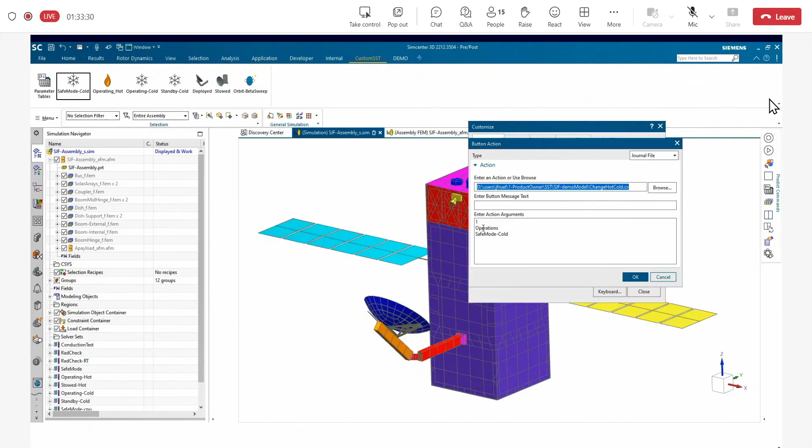Remember these operations or the parameter tables that we saw, we created them earlier. They get captured and you have them as a part of your custom ribbon bar, which is very workflow centric to your space system thermal applications.

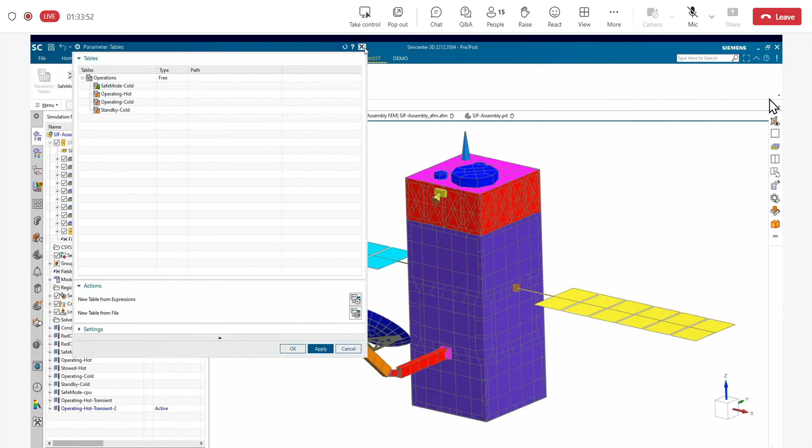You're going to solve it for the Orbit-BetaSweep, which will throw up a series of results. And then potentially you will be in a position to compare your transient simulations for the hot cases, maybe operating 1 and 2. What you are seeing here is the beta variation from 10 to 45 in terms of the parameters that have been defined.

So if we go back to the notepad and see the results, you will be able to articulate the corresponding outputs, whether it is your operating hot, stowed hot, or safe modes, and the corresponding 1D or the heating or the piping elements that you wanted to take a look.

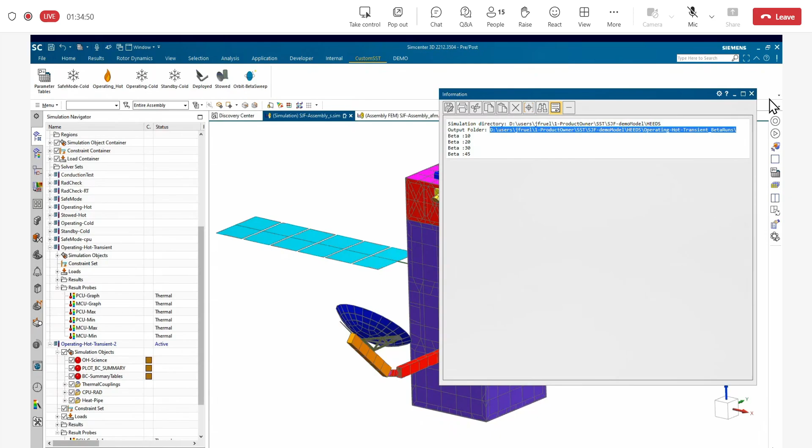While it's very important for us to understand and appreciate what space systems thermal brings to the table when it comes to satellite engineering, it's equally important to look at whether the satellite will become operational, all the way from launch to the orbiting and, of course, to the deployment.

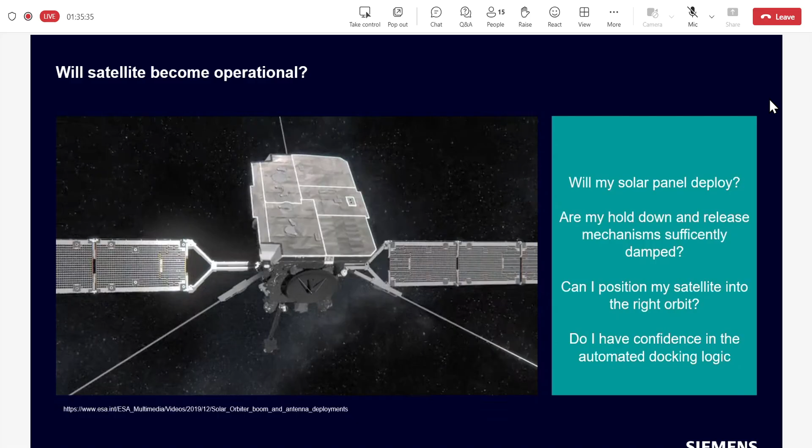So one of the elements of SimCenter, which is helping this endeavor tremendously, is what we call SimCenter Motion, where we are going to look at how predicting, analyzing, and improving the positions using SimCenter 3D Motion will help you build a robust and real-time feedback-giving multi-body kinematics and dynamics profile.

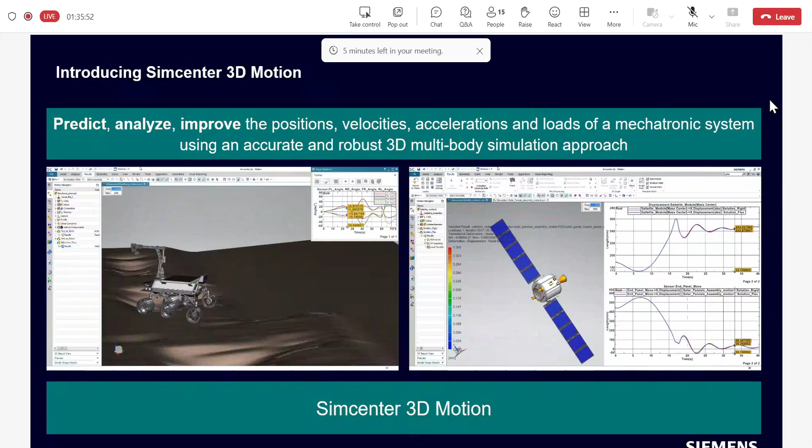On the left-hand side of your screen, you see a Mars rover, which was an improvised version of the earlier Mars rover that was created. On the right-hand side, you would see a complete solar panel array getting deployed from stowed condition to the fully stretched or fully functional condition.

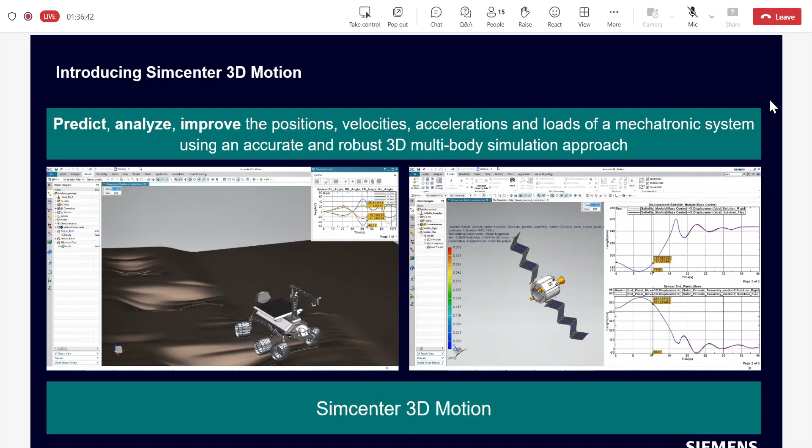So what are we looking at? We are looking at the kinematics part of it. We're also trying to see, on the right-hand side screen for example, the flexibility, or what we call flex body dynamics, where we are indicating that you can bring in the flexibility of your structures, induced either through the structural modeling or through the thermal simulation, into the kinematics, and hence re-verifying or revalidating your models not only structurally, thermally, but also kinematically and dynamically.